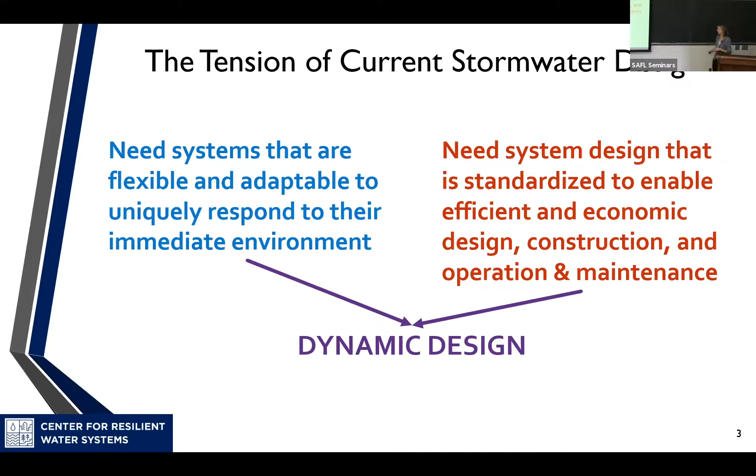So there's a bit of tension, but the other aspect is we still need to define the context of green infrastructure a little bit. In the early days when we started moving towards stormwater green infrastructure, we were really trying to sell it to people as an idea - it can do stormwater and provide a suite of ancillary benefits. It's going to clean your air, have social benefits, environmental benefits, aesthetic benefits. And now we want these little green infrastructures to do so much. So sometimes I think we get a little confused in terms of design.

We often say that stormwater green infrastructure is supposed to be for these everyday, small, frequent rainfall events, but yet we design them under extreme rainfall conditions. Is that really the appropriate context? So we still have to answer this question. That's a step back from dynamic design - it can't answer that question, but it can be part of the way we think about the role of green infrastructure.

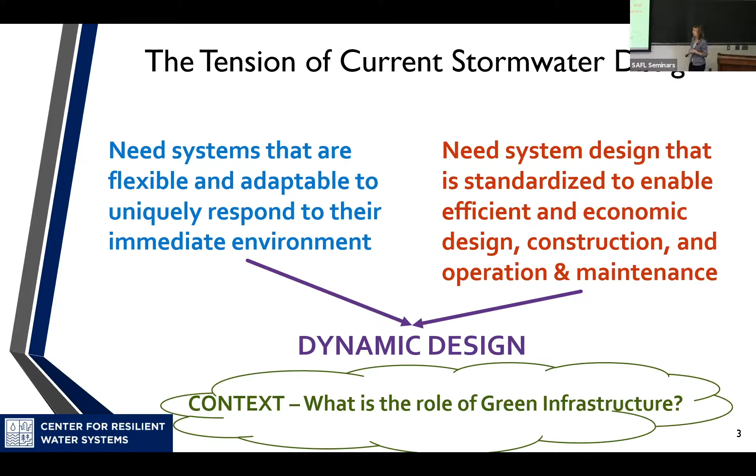So getting into this - nothing groundbreaking here, but setting the stage - traditional green infrastructure design typically uses a volume-based approach where, depending on where you are, you may have slightly different ways to do this. Typically we either take ponded storage and subsurface void storage - that's the space available to hold your storm - or ponded storage that has to infiltrate within some time, usually ranging between 24 and 96 hours.

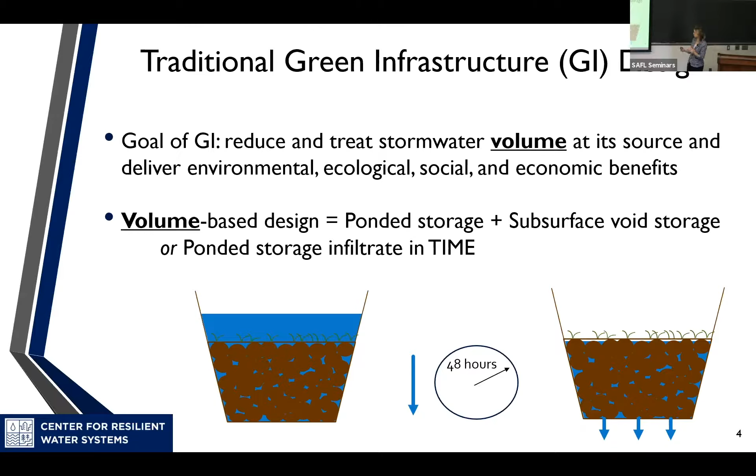Here in Minnesota, it's 48 hours. In Pennsylvania, it's 72. So we basically treat these things like a bathtub. We try to do the volume component, usually capturing 1 or 1.5 inches immediately - just all the water coming in at once. But then we also think about how these are going to handle peak flow rate, and we want to manage typically those smaller, more frequent events like the one-year storm.

But then we also want to do sometimes peak rate matching for lower frequency events as well. And often we're going to apply one of the NOAA distributions, or like an NRCS Type 2 distribution. I'm not sure how many of you saw Bill Hunt's talk last month, but there was a lot of discussion on whether, for extreme events, NOAA Atlas 14 is really the best tool to be moving forward with for large flood infrastructure design. I think we can have the same argument when we're talking about green infrastructure design - should we be using these kind of extreme distributions associated with the NOAA Atlas? And then sometimes we add in water quality loading as well to what our design goals are traditionally.

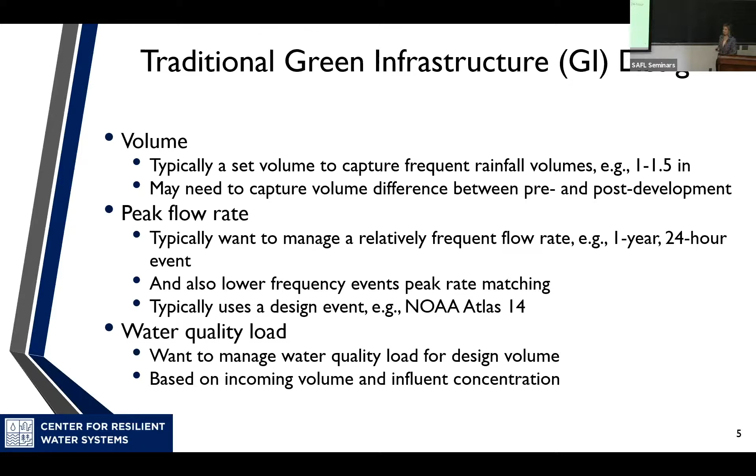So all of this comes to how we've been kind of thinking about and designing these systems over time. What I'm going to show you is a series of systems that I call overperforming, and I think this is something we need to think about and come to some terms with. I was having conversations this morning about what overperformance actually is. Here I'm saying it's a system that regularly exceeds the design expectations - that static, volume-based approach. But what do we consider overperformance or exceeding those expectations? What do we consider underperformance? I think that's actually something that isn't a clear definition quite yet.

But all of these sites I'm going to show I consider to be overperforming, and I'm not cherry picking just the good ones. We consistently see this, as long as a system doesn't fail pretty immediately after construction, usually due to some sort of construction issue - whether there was compaction during construction or it just wasn't designed quite right, causing a pretty immediate failure. Typically these systems seem to persist over time.

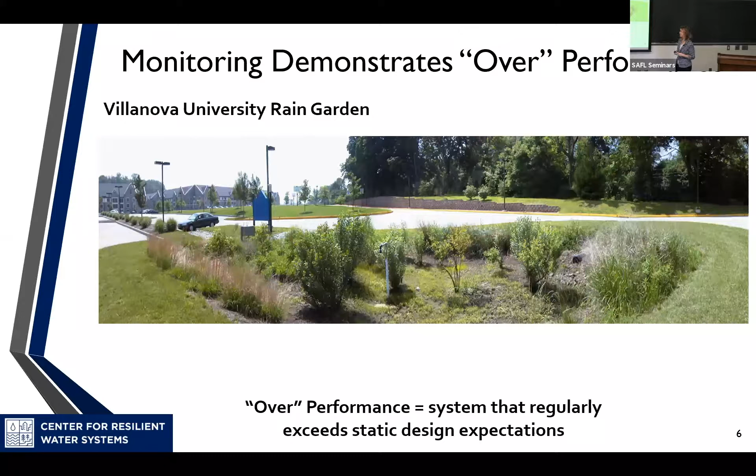So this is a site on Villanova's campus - it's a rain garden that we've been studying since 2003. With that, we've seen over 1,000 rainfall events, and we've only seen 26 substantial overflows. Yes, some of those overflows did occur for rainfall less than the design, however, there are many more events where we had rainfall greater than the design condition and the system fully captured them. So I consider this, in my opinion, an overperformance. 26 out of 1,000 is a pretty good performance rate, I think.

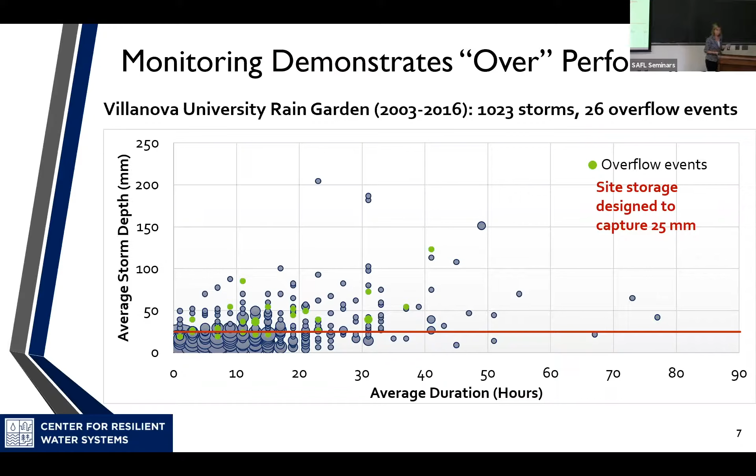This is a newer rain garden system near the Philadelphia Zoo that we've been studying. Same story, less amount of data that we have, but again what we're seeing is it's well before or well beyond what our design rainfall was until we start getting overflow. And again, even under some large events such as this one here, we're still able to fully capture it.

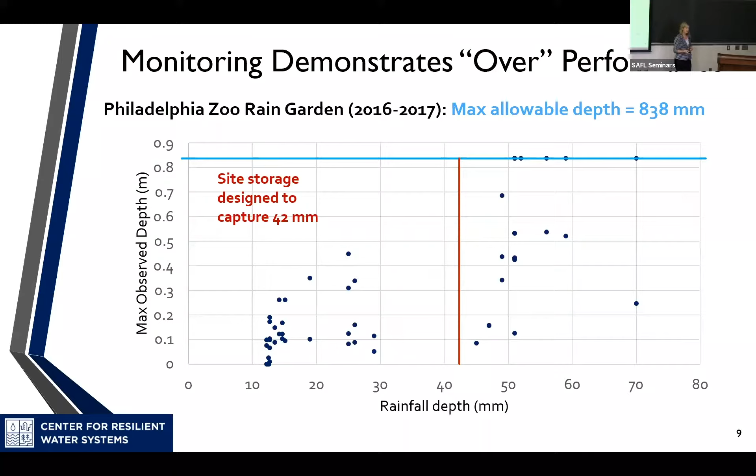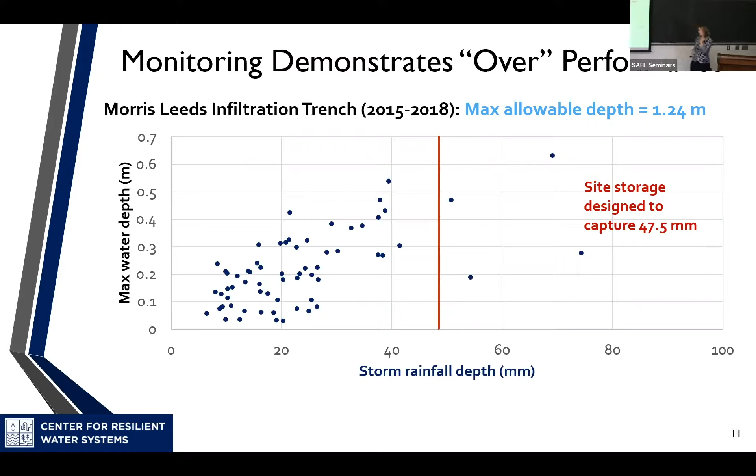And then here's another infiltration trench system in Philadelphia, and again a similar story here. Yes, we've had a couple of excursions where we saw overflow again above the design amount, and again still design amounts, or rainfall amounts above the design, that are captured. Again, you've seen data like this before. And then we get into why - why is that actually happening?

So this is the zoo rain garden that I showed you a couple slides ago. What we wanted to do is try to break it, figure out how much it's really going to take before it fills up. The system was designed from that static perspective to capture 36 millimeters.

So we've been conducting something called simulated runoff tests, or SRTs. We also find these are a really great way to do right around construction time to see if there's going to be any immediate failure - like is water getting in where it wasn't supposed to, or getting out where it wasn't supposed to? So we've used it to construct, or actually fix, construction issues, but we also use it to test our system. In this SRT, we wanted to figure out how much water we could apply until the system filled up. What you see in the black bars here is how we put water in.

We started putting water in at 0.2 centimeters per minute, cranked it up to 0.25 centimeters per minute, and then ultimately 0.3 centimeters per minute. So this is a pretty high application rate of how much water is getting into the system, coming off the street, coming into the rain garden system.

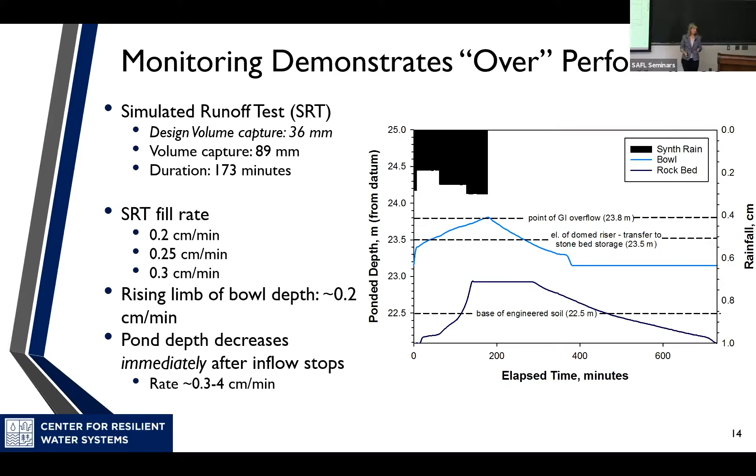So again, we've been looking at this over time. And so how can we start taking advantage of the infiltration that we expect to be happening through the event and then immediately after the event?

So we know infiltration or exfiltration is happening during the event. We've been studying evapotranspiration, and we know that happens all the time, and that is a big component in helping to restore the capacity of a lot of these green infrastructure systems in that inter-event time, preparing it for the next event. And then we also know that there's a seasonality component, right? So when you saw some of those systems where maybe there was overflow, and then for a same size event there wasn't, is there a seasonality component to it? So this gets us to thinking that if green infrastructure is really supposed to be for managing those small frequent events, then we should try to match the design to match that local hydrology.

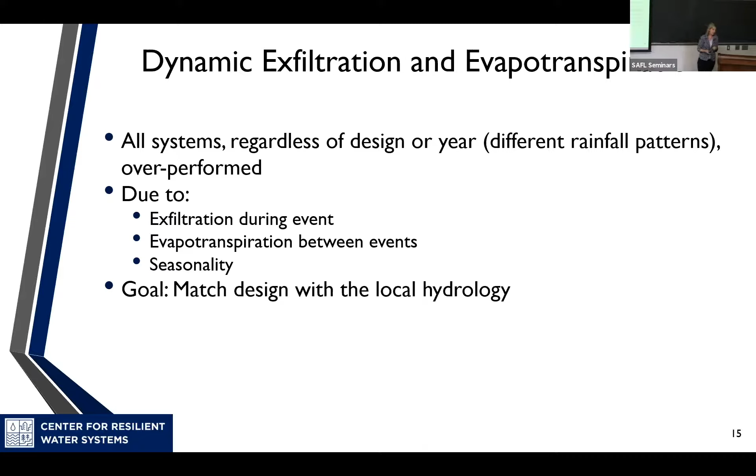So that's what we're trying to do here with dynamic design. And a couple of other points that are motivating us.

This is some work that a graduate student who worked with me a couple years ago, Dr. Amanda Hess, was working on. She was looking at small rain garden microcosms, we call them lysimeters, of different soil types. She was measuring the outflow, or that's your exfiltration, and then the ET. So the outflow or exfiltration is in the dotted lines, the ETs in little symbols.

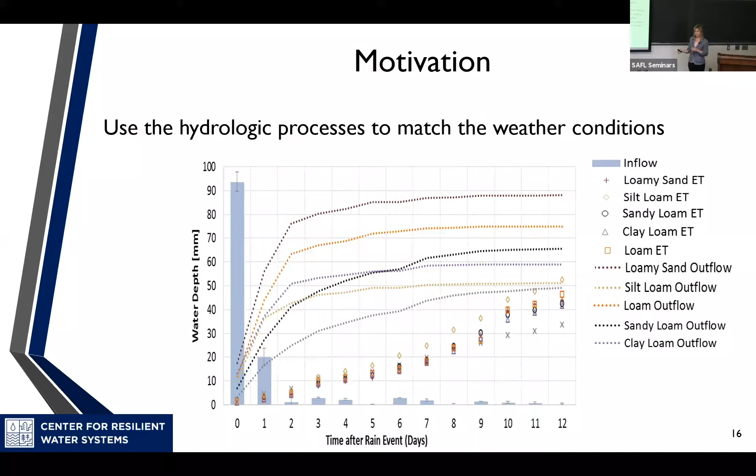So as expected, right? When it rains, we get a lot of infiltration immediately, and then we see that persist over the next day or two, and then it kind of stabilizes out. Depending on your soil type, you might get a longer period where you still have some sustained infiltration. And ET is happening consistently every day after. We keep accumulating our ET until we start getting an ET volume that is actually relatively competitive with some of our infiltration volumes. So we want to figure out how we can include the infiltration that's happening, not just during the event, but after the event, and then the ET that's happening as well.

And as we were looking at this, we started thinking about what happens in Philadelphia. We don't have the winters that you all have here, luckily, because I'm a baby when it comes to really cold temperatures. So instead we just kind of fluctuate around warm, cold winters. And then we have pretty warm summers.

And what is our worst case scenario? If we're thinking of designing for these large hydraulic structures like spillways and flood management, then we do need to be thinking about your PMP or these really extreme events. But these are green infrastructures - if they fail, water just bumps over the side and gets onto the street.

I don't want to diminish the severity of that, but we have a different scale of what the risk and impact is. So the next thing we did, working with one of my other students, Dr. Carol Albright, we started to look at what's happening in Philadelphia, like when do we have most of our rain, and when do we have most of our infiltration and ET?

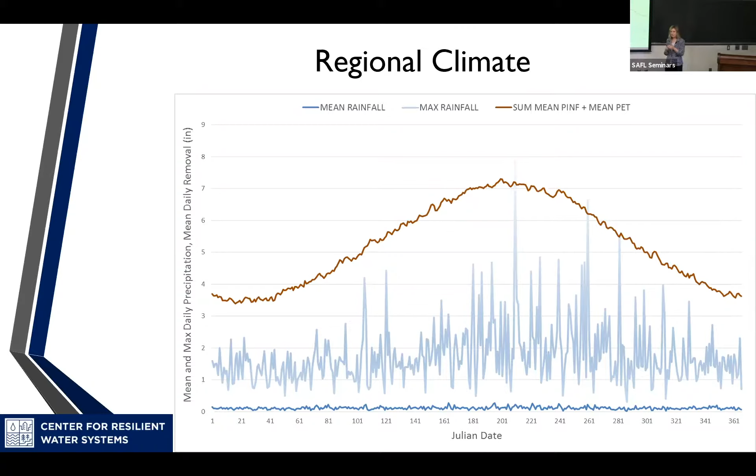So this gets us again to that question of how can we start to match our design to our hydrology a little bit more?

One last thing, thinking about our rainfall: a lot of times with these green infrastructure designs where we're just trying to treat volume, we say okay, all the volume comes in at once, but that's not true, that's not how it actually works. And when we do try to put a distribution on it, we put a distribution like the NOAA type C that we have on here, or one of your NRCS type curves.

And this is a large event. This is not a typical green infrastructure event, but it just kind of drives home the point that this is a larger, less frequent event, and we still don't see this distribution. So this is 3.76 inches in 24 hours, around the 4-year event in the Philadelphia area.

And the blue dots on here are the actual rainfall, so you see what the rainfall normally looks like. You have some periods where there's some intensity, and then it goes back down to a little bit more of a drizzle, then you have a little bit more intensity, and it kind of goes seesawing back and forth. But rarely do you get this one large peak intensity event that you get out of the NOAA type C distribution.

And again, if we're trying to design green infrastructure to handle these everyday events, does it really make sense to design for this extreme case, or should we actually be designing for this case right here, which potentially could be more limiting?

In this one example, a lot of the rainfall is coming at the end of the event. So if we've saturated our system, maybe we actually get more outflow potentially, because of what's happening here. So thinking about what the appropriate rainfall pattern that we should be applying to these systems is.

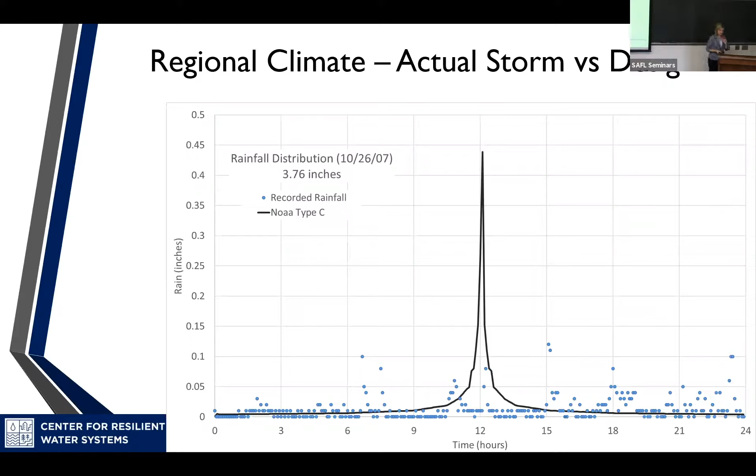So all of this kind of comes together to get us thinking about dynamic design. We have 2 approaches that we can use. We can use the design storm approach, which is kind of the classic approach we're typically using, where we say this is our design storm, and it's like a single event. We make an assumption that the system is empty when we start, and then we apply whatever our design condition is, and then we go on with our design.

And we don't necessarily think about when this is happening during the year, we don't think about what is happening within the watershed at all. So it's a pretty isolated case.

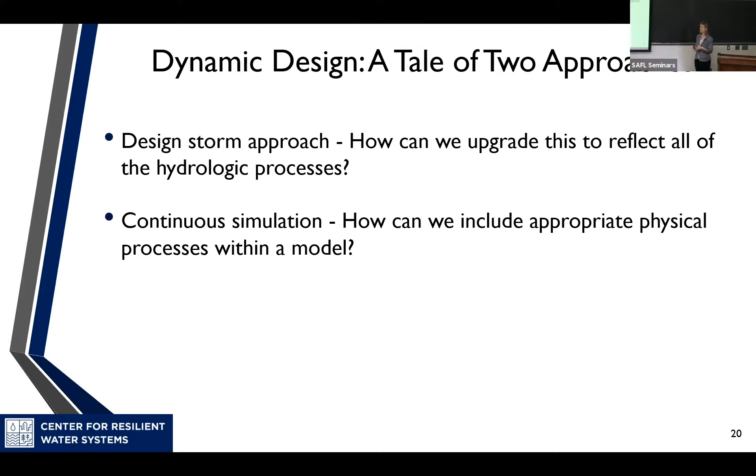And then we have continuous simulation. There has been a lot of work done on continuous simulation. I've seen a lot of the work here in Minnesota on continuous simulation and how that has informed a lot of the design, your MIDS calculator and things like that. So how can we kind of move towards a continuous simulation as well and include the appropriate physical parameters within them?

So we're going to talk about the design storm approach first. I don't know all the details of your MIDS calculator and everything that went into it, but it seems like the continuous simulation that was trying to include some of the infiltration and ET processes is included there to a degree, what it kind of appears like.

This is something we're piloting in Pennsylvania. This is just proposed right now, it's not yet approved. Taking what we've been seeing, we do have infiltration during an event, and we do have ET happening after the event that we want to take credit for, because that's what's really preparing the site for the next event. We're coming up with this schematic.

To walk through, what Pennsylvania is requiring is for us to handle the 24-hour event. We know infiltration is happening during the entire event, but to be conservative, we're going to say let's take credit for half of that time. So rainfall comes in over 24 hours and we have 12 hours where we say we're filling the media, and then we start allowing 12 hours of infiltration during the rainfall event.

Then we take that 12 hours and an additional 72 hours to get rid of our ponded volume, because that's the regulation in Pennsylvania. So we have the additional 72 hours, and then we also have an additional 3 days. In this time, from the cessation of rainfall to the end of this 7-day period, we're allowing for infiltration and evapotranspiration as ways to recover our storage capacity.

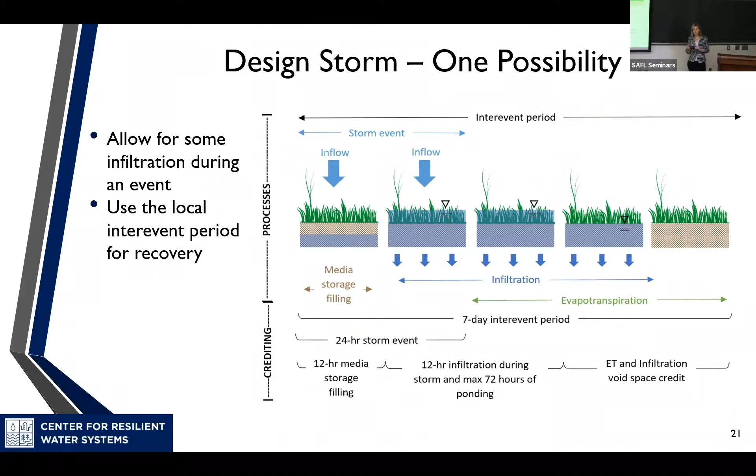And then we needed a way to include evapotranspiration, and again, we're doing this from a design storm approach. So we wanted to keep it simple and not overly complicate things by having to run Green-Ampt for infiltration or run one of our evapotranspiration models. This is work continuing what Dr. Amanda Hess worked on that we're trying to include within the manual - trying to take all of those studies where we were quantifying how much infiltration there was and how much ET there was, and putting that in terms of a void space credit.

So one of the ways that, in Pennsylvania, we're accounting for a design storm approach or a volume-based approach is you can take credit for your void storage space. Typically, if you're using sand, you get 30% void space credit - that's your material, that's your credit. So the green line, the top green line on here, is sand.

Combining the traditional void space with how much water we were actually getting through infiltration and ET, we were able to put this into a volume per volume perspective and look to see what we could get for void space. If we look at this green line, just worrying about the solid lines for now, this is going to be depth dependent. So for example, if we have 40 centimeters of soil depth or rooting depth, we can actually get almost 38% void space credit. It's a way for us to take advantage of the void space that ET is going to free up, as well as what's going to be stored and infiltrated.

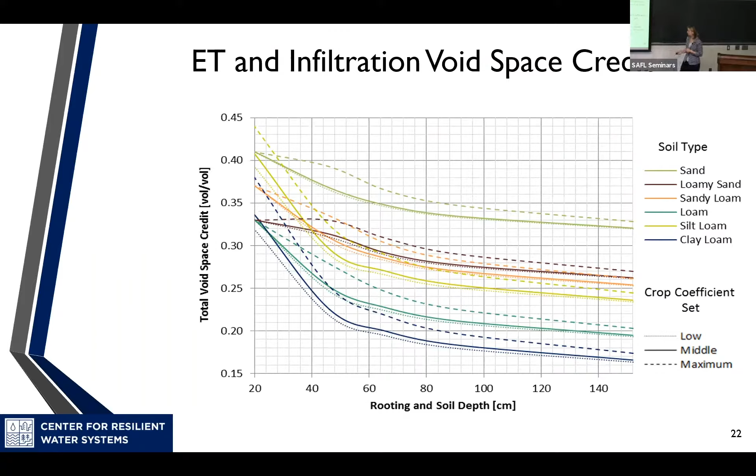Looking at this, across the state, the points are the traditional static storage model we've been using - just your traditional void space and ponding volume. What we're calling the spreadsheet model is that schematic I just showed: 12 hours of infiltration and then the ET void space. The spreadsheet model is the dotted line here. A nice way to put this is, we're saying SCM, stormwater control measure, interchangeably with green infrastructure - the physical footprint of these sites, we can actually, just by taking advantage of that infiltration during the event, even though it's conservative, and taking advantage of that ET with that extended period of time, we can pretty substantially reduce the footprint size for type B soils and type C soils.

D soils, we don't really see much of a change, but that makes sense because D soils, you're not going to get a ton of infiltration in 72 hours, right? And particularly in the urban environment where space is premium and space is really expensive, being able to reduce your footprint size substantially, this means a lot.

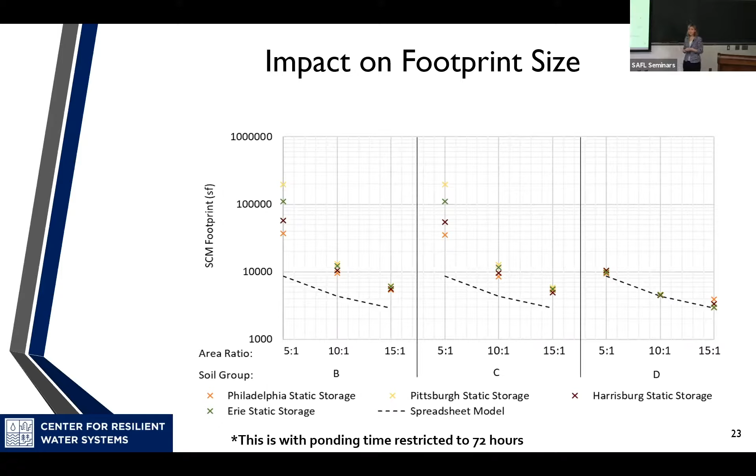So one other thing that we're batting around, this is more working with Philadelphia Water Department, and we're still very much in the conceptual stage here, is the same idea. What is an appropriate rainfall to actually be using, as opposed to the NOAA type C distribution? What is a good KSAT to use in lieu of infiltration, and how can we let that vary over the course of the year? And then what we're suggesting is run your design storm as you have been doing it, but do it iteratively.

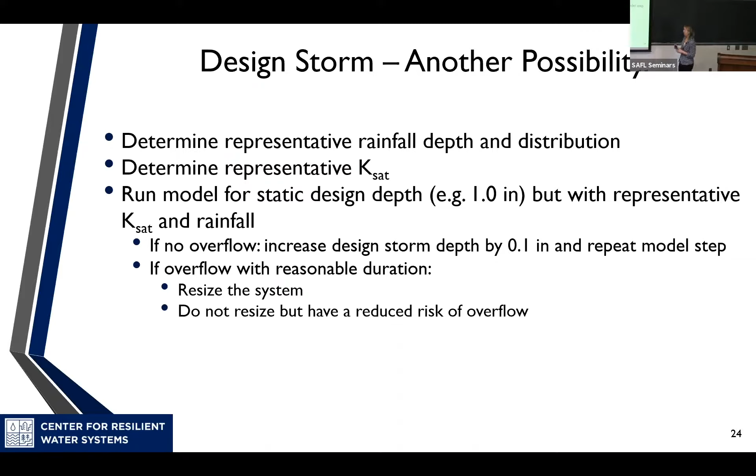And by making some adjustments to your rainfall and KSAT, keep spinning through the model. Because then you can say, well, if I'm designing this for 1 inch, but it seems like it can capture my 1 inch, well, see what you can capture. And then you can either resize your system, make it smaller to just capture the 1 inch, or you can take more credit, right? Or say you have a lower risk. So these are different ways that we can think about it.

So the design, or the representative rainfall, this is a very new idea. This is just a couple days old that we've been playing around with. We're looking at 3 years worth of data, and we decided to bin our rainfalls. So these are all of the rainfalls at this one site for 3 years that fell between 0.95 and 1.05 inches of rainfall. And this is just the distribution over time. So we see this one event, the blue dots, that's a very long 1 inch event, right, 42 hours. But then on the left-hand side, the green dots, that's a very intense event.

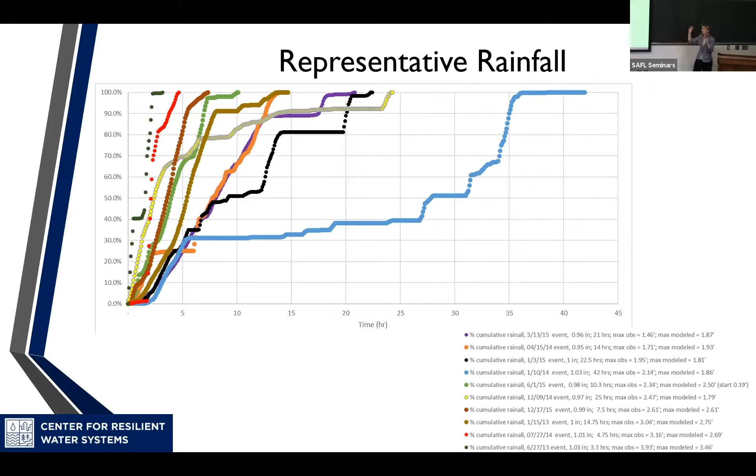But you see all of these other ones in the middle, and some of those lines actually cross over quite a bit. So maybe we actually use one of those lines in the middle. Is that really most representative of the rainfall distribution that we should be applying? We're not forcing something like a 1 year, 24 hour. We're not forcing a certain distribution. And most of the events are kind of in the 8 to 12 hour range, right? So it might not be appropriate to design over a 24-hour window because that's not the way we're seeing rainfall for our design condition. So we're still playing around with the answer, but this is where we're headed with choosing a representative rainfall.

And then we've also been looking at data to figure out an appropriate way to modify your infiltration over time. We looked at a bunch of data and calibrated a bunch of different sites, and we came up with these multipliers to apply to your KSAT to get the infiltration. What we're suggesting for the Philadelphia area is a multiplier of 1.6, which puts us at a season of May, which, when we think about it, kind of makes sense.

Philadelphia did not get the memo that it was supposed to be warm last week, but typically May is getting warmer. And we do have a lot of rain, right? But we don't have these big extreme events. We have rain probably more frequently than once every 7 days. Last week we had rain every day. But typically in May we get rain more like every 3 to 4 days. Not really big events, but is the system ever fully recovering? So by the end of May, that's actually really stressing these green infrastructures. So maybe May is an appropriate month to design for.

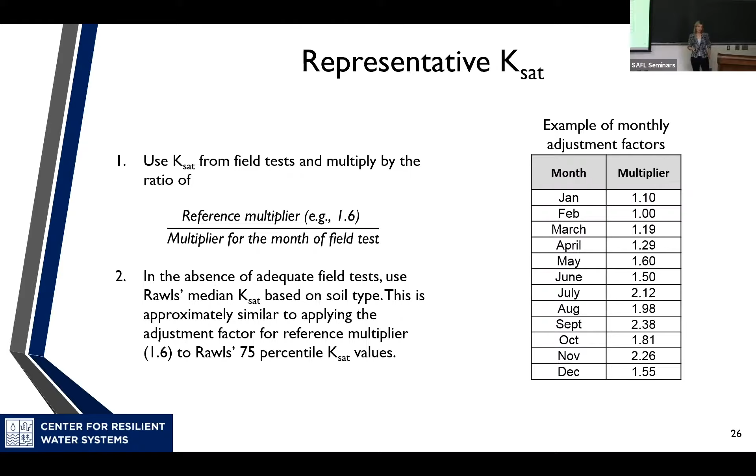So we're suggesting whatever month of the year you do your field test, you adjust your KSAT to be the KSAT of May, and then apply a rainfall pattern that we think is appropriate. This is all for that design storm approach, but we also like to promote continuous simulation. So we're going to take the same concept and move it towards continuous simulation. So our KSAT goes both ways. But for the representative rainfall, we can choose a representative year. That's what Philadelphia Water Department does, Alexandria, Virginia does it, and a couple of others.

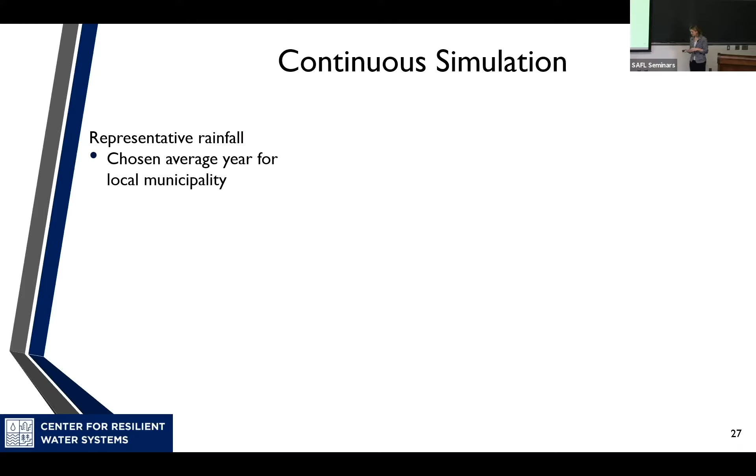One of, again, my former grad students, Dr. Carol Albright, she was doing statistics on different years and was very unsatisfied with the way the statistics were coming out of looking at rainfall data, trying to come up with what is the most representative year of rainfall data. And so she gave up on statistics and said, I'm an engineer, let me do calculus. Like, go for it, go do calculus. And so she came up with this calculus-based distance approach.

And so what we think, or one way to suggest, is moving forward, you can now start to create your own rainfall record out of this. So you can create 3 wet years in a row, 3 representative years in a row, mix it up, put a couple of dry years in there, so you can start to create maybe a representative decade, a representative 20-year period, if you want to go through continuous simulation.

And then lastly, we can just use our long-term historical data record. For Pennsylvania, we're suggesting a minimum of 20 years. When you do a lot of climate forcing, they suggest a minimum of 30 years. The nice thing about using historical record, if you have it available, is it is the rainfall that actually happened. But I think maybe we should actually move towards using climate forcing and doing continuous simulation with a climate forced rainfall record, because we are designing for the future and not the past.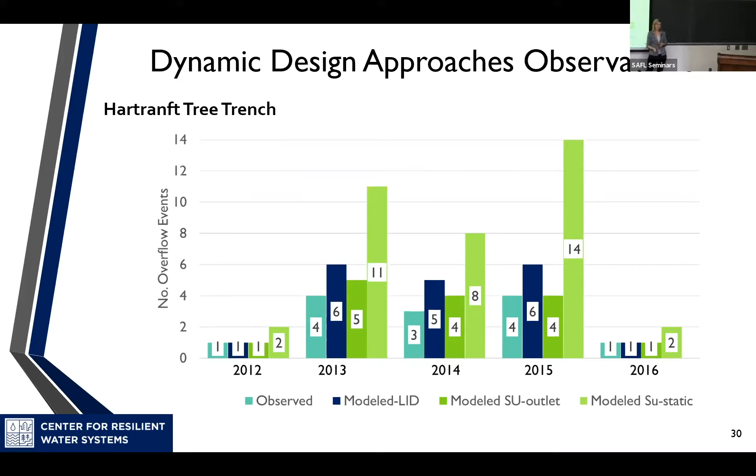So some of the benefits of dynamic design, as I see them, is we can start also thinking about other things like the geomorphology and flow duration. So we get a better idea of this. This is moving more towards this concept of a one water approach, where we are considering not just our green infrastructure, but what's coming into our green infrastructure and what's leaving our green infrastructure on a larger watershed basis. We can bring in that water quality component relatively easily.

We can move perhaps more towards smaller footprints, making areas available that maybe previously weren't. And that goes along with maybe encouraging more vegetated systems as well. And then eliminating components that we've put in previously that maybe have a higher failure rate or are harder to maintain. So when in doubt, it's always been, okay, we want to do this kind of vegetative feature, but just put in a rock bed or put in some gravel storage, because that's going to take the lion's share of the volume. However, those can fail more easily and they're a lot harder to maintain.

And I think where we are right now, again, working a lot with Philadelphia Water Department, every time I talk to them, I hear the word maintenance. 20% of the words that come out of their mouth is maintenance, right? It's like maintenance, maintenance, maintenance. And so the maintenance piece is a really big part of it. So if we can eliminate components that need to be maintained, great.

And then we can also start getting actually to those ancillary benefits that we talked about. If we move to a dynamic approach, we can maybe start to design a little bit more for plant health and not just think strictly from a volume approach itself. We can get the volume, but we can also do these other things.

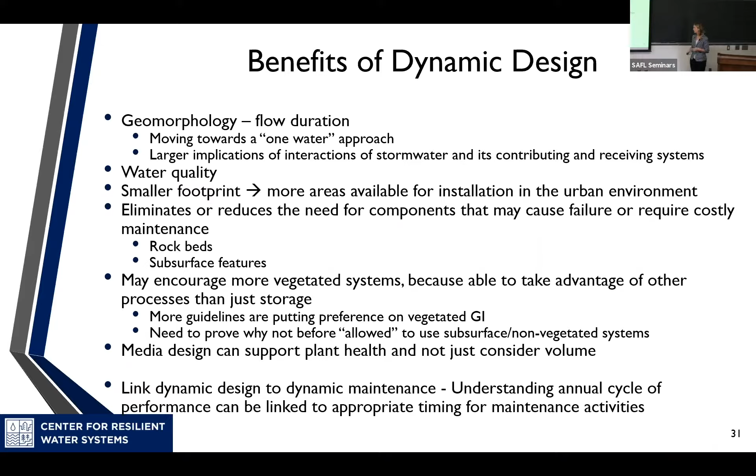So this step forward into our new horizon here, I think we're at a really wonderful opportunity. We have a lot of knowledge, a lot of people working on this. We have a lot of technology available to us. And I think we're all sort of standing on the precipice and really nervous about making this giant leap forward, but we can do it. We're all together. Again, we have the potential to add areas that we couldn't use before, to add technology to these systems; both in situ and remote sensing have improved quite a bit. And I think we have the data analysis techniques available to us now to really make some smart decision making when it comes to both planning and placement and then operation and maintenance.

The idea of can we standardize things and have widget one be used in multiple applications, I think we're kind of getting at that point as well. So we can start to find some economies of scale in terms of our design, and not just thinking of it from the green infrastructure side, but also economies of scale in terms of, as I call it, the hardware of the systems. So your curb cuts and your inlets, your outlet structures, these are all the things that are actually controlling the flow in and out of the system. And I think those are aspects that could be perhaps better standardized.

This, I think, also looking from a dynamic design component, plays into adapting to and planning for climate change. And then we can even use this a little bit as we're trying to come up with our definitions of acceptable risk and what is failure, right? Our risk and our failure are things that are still, I don't think, super well defined. And we all kind of have different definitions of them. We were talking a little bit this morning, and if you're a contractor, failure is a bad word. But if you're a researcher, you're like, sweet, what can I learn?

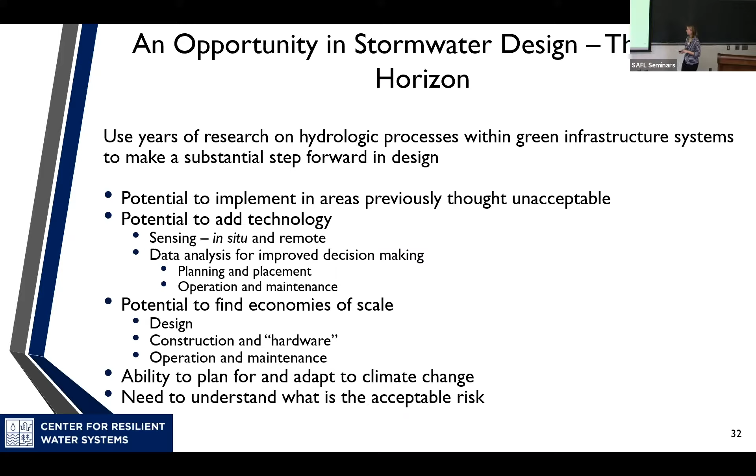So it's not just that difference, but if your system misses its target once, is that a failure? If it's performing at 50%, is that a failure? What do we actually consider failure? And that goes along with what do we consider risk? And what risk are we willing to accept? We have those well-defined in many other areas of engineering, but not so much in our stormwater, specifically with green infrastructure. So with that, I rest on the work of a lot of others.